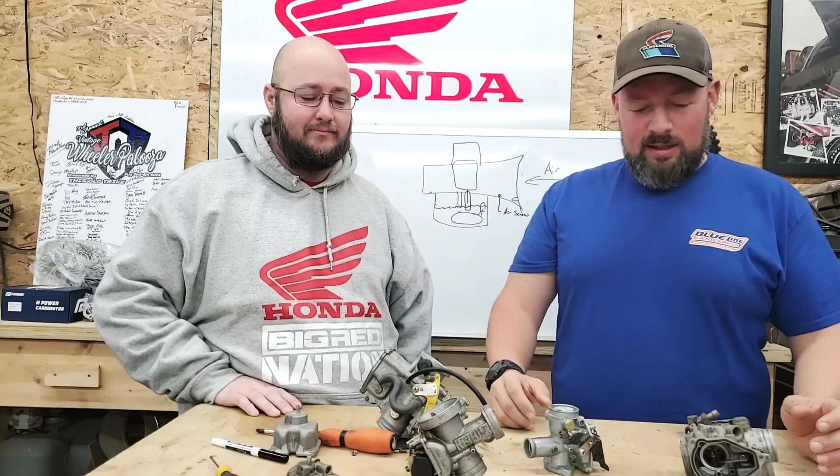Hey guys, thanks for watching. So I'm here with Curtie. We've got a smattering of carburetors, nothing super pretty, just whatever I had extra, but this covers your Big Red 250s, 250SX, 350X, your smaller machines, your 185s, 200Ss, even down to 110s and 90s are different, I guess, but 250R carburetors, and then some more modern stuff, 300EX or 400EX.

It's got an accelerator pump put in it, but as we said in the beginning, we want to talk about some carburetor basics. All of them operate under pretty much the same principles, and that is the Venturi effect.

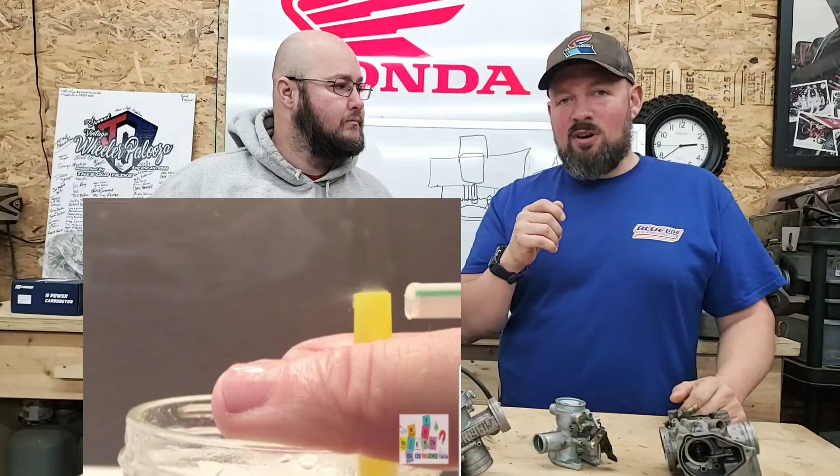So just like if you had a cold drink and you had a straw and you blow air across the straw, you can watch the liquid rise in that straw. That's the Venturi effect. And how big is that straw? Bigger straw, smaller straw? How fast are you blowing?

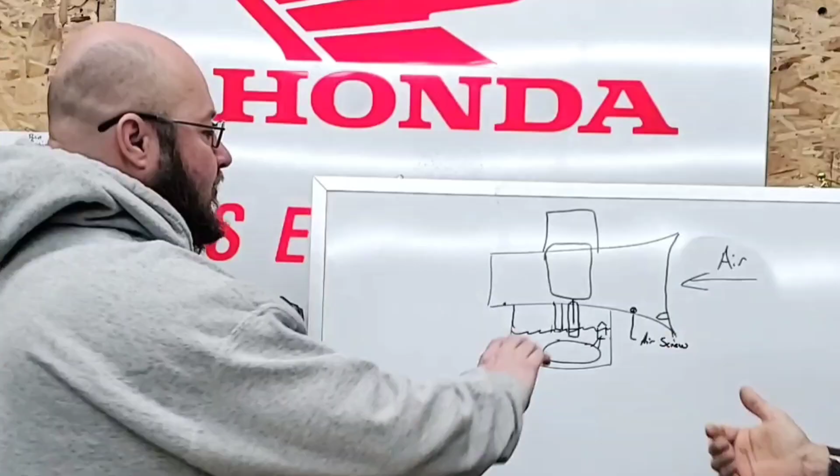As that relates to carburetors, we have air passing from your air box over here into your motor over here. It's a cone, basically. You called this the intake bell. So it is forcing that air down, and that increases speed? Yeah, well it'll be choked a little more here in the center than it will be even towards the engine side. So kind of out and then up, almost like an hourglass, where your slide is.

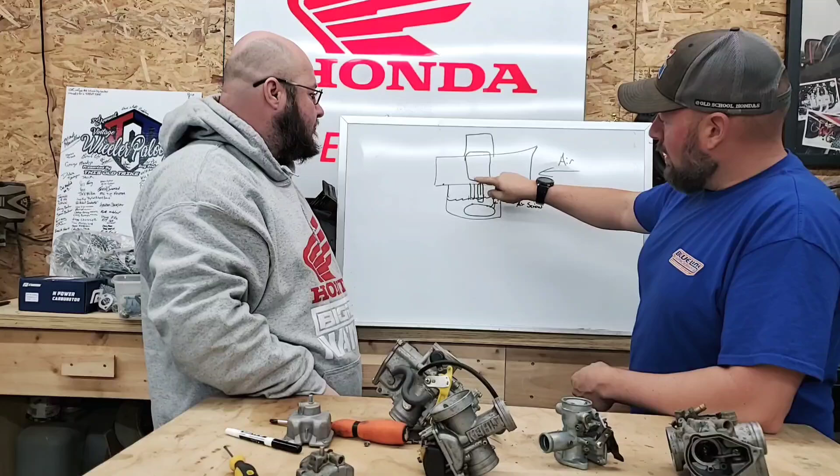So when that air rushes past, basically these are your straws. You've got your pilot circuit and main circuit, and sometimes there's a third circuit—we'll let Curtie talk about that later. But when your machine's idling...

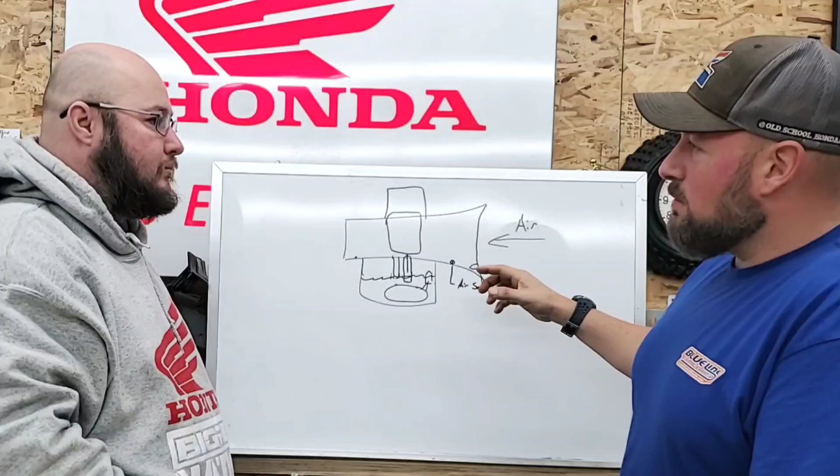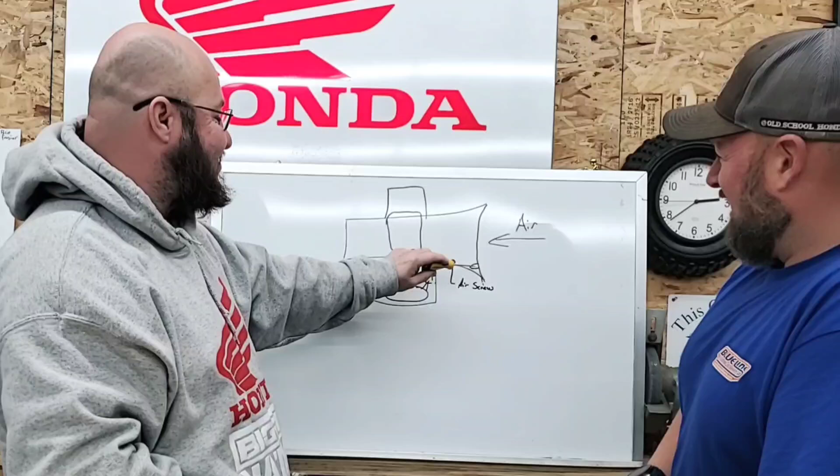It's taking air. You were describing this to me, I don't want to goof it up. It's taking air from a different spot when it's idling. Right, so when your slide's all the way down and you're at idle, pretend this is a nice little intake hole for your pilot circuit. A little bit of air will come in through here, it'll be directed, there'll be kind of vents.

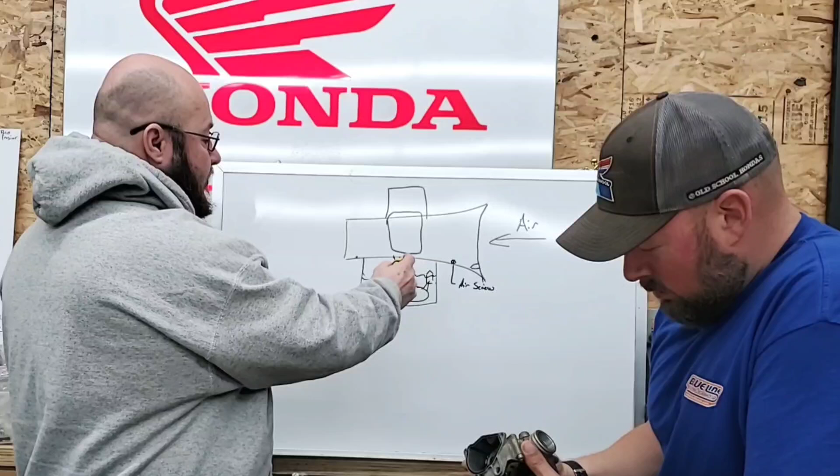The carb is a lot like a heart—there's a lot of circuits and everything that run through the carburetor. So air will come directly past the pilot jet or pilot circuit and come out a little hole on the engine side, and that's what kind of controls your idle to third throttle.

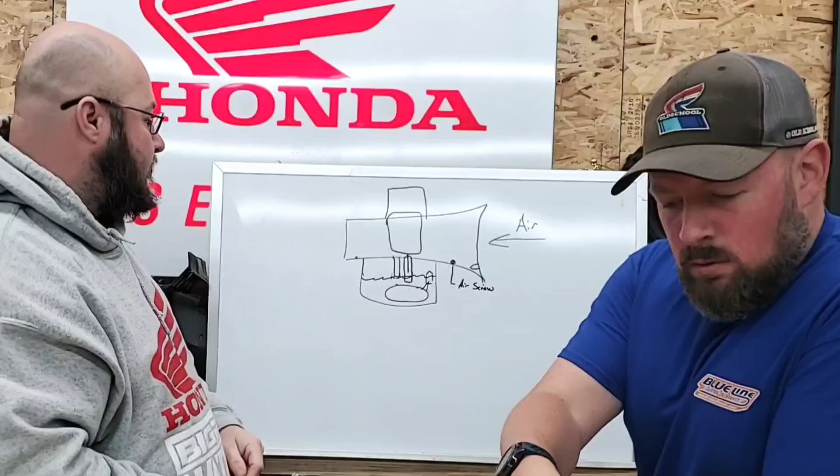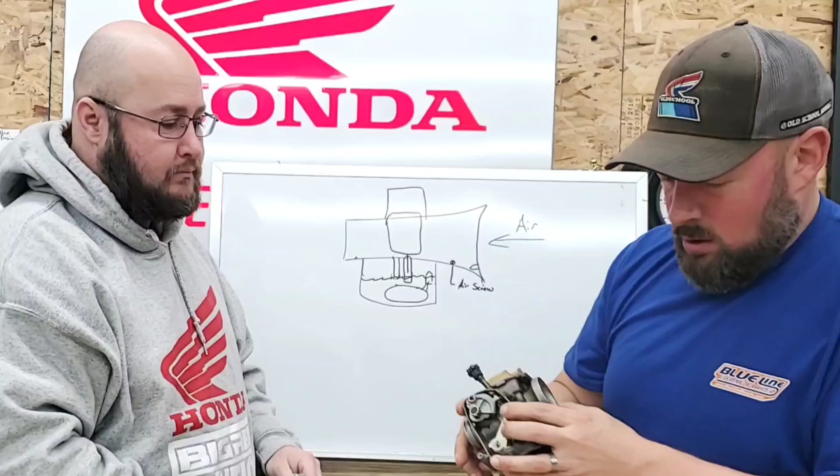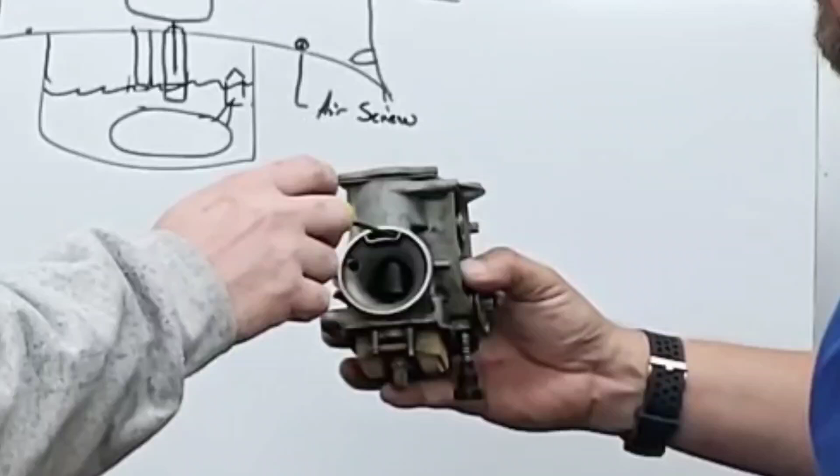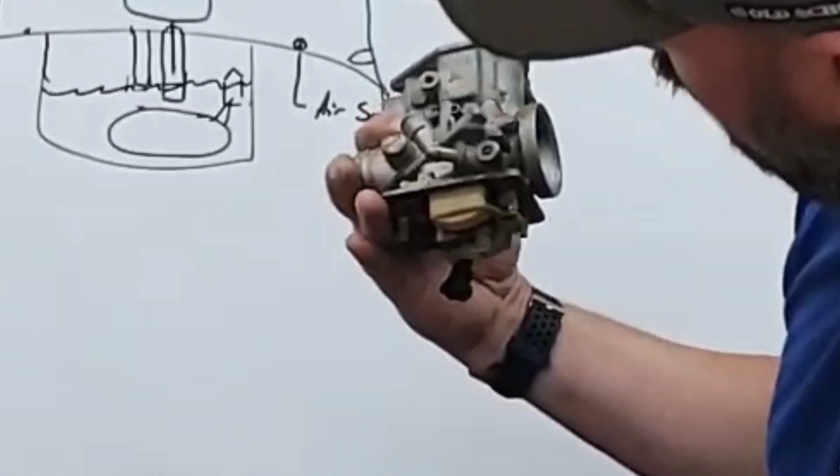So on this, it's these tubes, right? This is your 250R carburetor, you've got these right tubes down here. Now where is it on this guy? Oh, right down here, I was looking at it backwards. Well, I'm upside down. So on this carburetor, which you'll find on the 250 Big Reds, 350X, TRX 250s, 350Ds, it actually comes in right here, and the ports are up here, so it kind of sucks air in through here. You can see on the sides where those circuits come down into the pilot jet or main jet or primary jet. Wow.

Okay, so when it's idling, it's getting air from a different location, and it's just sipping the fuel. And so that's why this one barely touches. Right, well yeah, your pilot jet will sit higher than your main jet, it's just kind of set at the level of the fuel. And think of it like a gas stove or a gas range.

You have that pilot, that little pilot. You're not operating your stove, but you still have that pilot lit, and that's exactly what a pilot circuit does. It just keeps enough fuel to keep that engine running at idle up to third throttle. Now, it doesn't shut off.

Once you start lifting the slide and you pull the throttle, it starts sucking up some fuel through the main jet here to get into the Venturi. This is still supplying fuel. So it's going to supply fuel through the whole rev range, but it's just going to be a metered fuel, just a set amount.

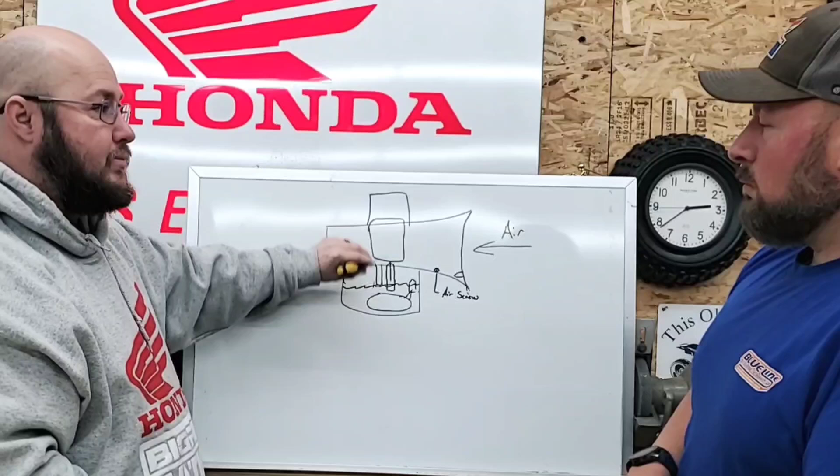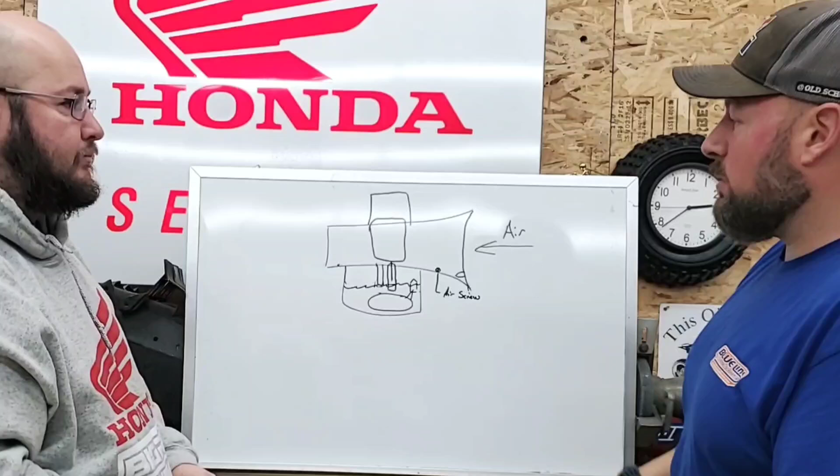Whereas the more you lift the slide, the more fuel comes through the main jet circuit. So as you start to give it throttle and your slide raises up, opening the needle, there's space that opens up around the needle, so it starts to drink and suck fuel from there.

Yeah, and it atomizes, so it mixes with air. Right here in the venturi. So the venturi is actually this section right here.

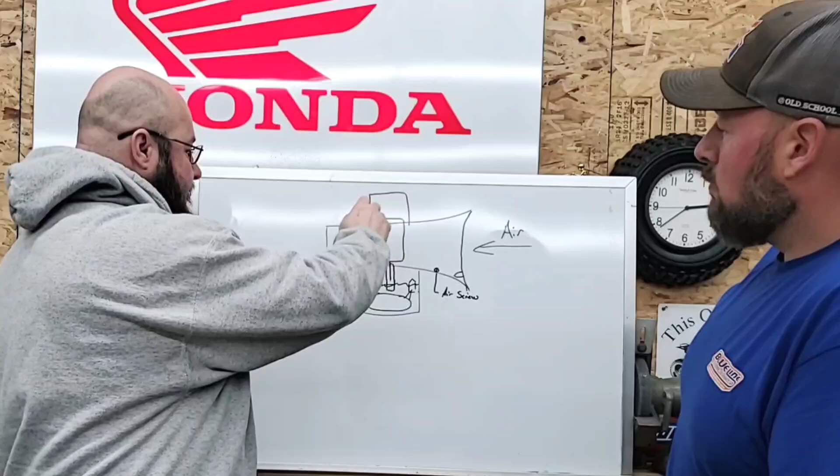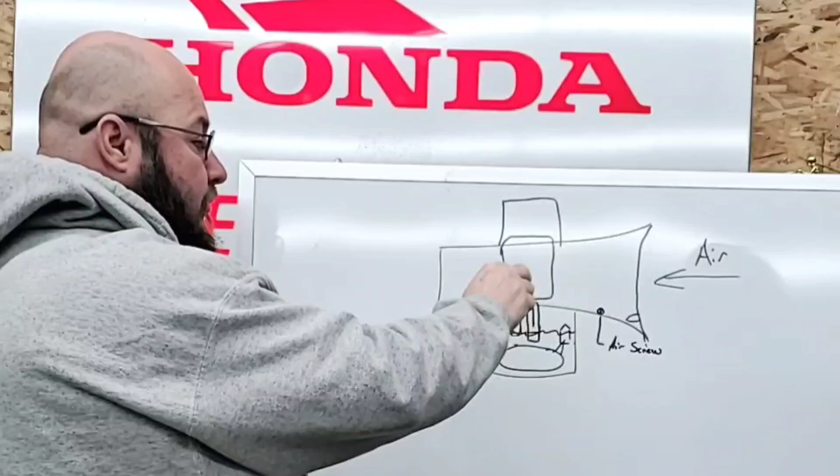So as you lift the slide kind of in your mid range, because the main needle is kind of cutting off the main jet, it's kind of allowing a little more and a little more as you lift it through the main jet until it's just all the way up and it's all main jet.

And it kind of comes up here, circulates around, and as that air gets sucked in, it mixes with the fuel to shoot it into the engine.

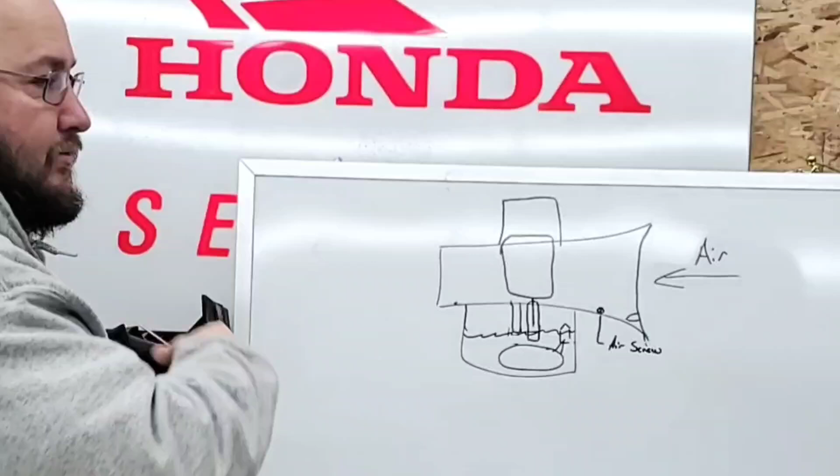Cool, so that's really the basics. The only other thing that's coming to mind is this is our float down here. So this is our needle valve. This would be connected to your gas line coming in.

So as your float goes down, the needle valve goes down and lets fuel in. As it rises, it seals up. It's got that rubber tip on the needle valve.

And this level here is as important as what jet you're running. So if our level is too high, that is going to force too much fuel prematurely through the pilot jet. And this is a situation, especially in a two-stroke.

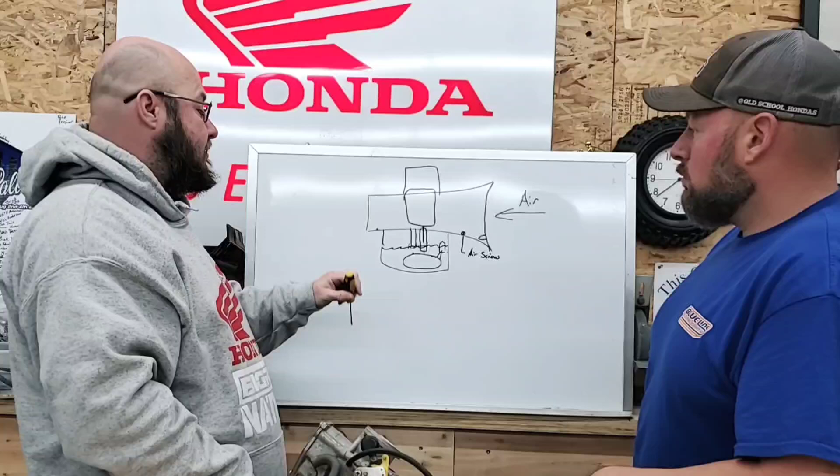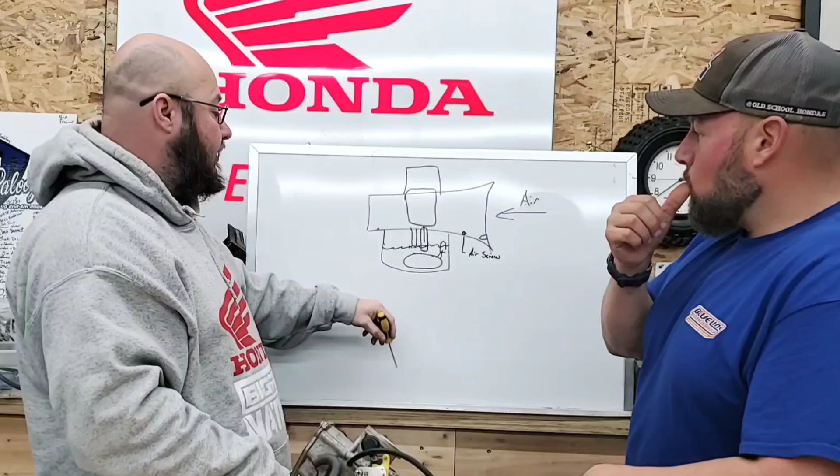If we've got the idle screw cranked all the way in and it's barely idling, that means your float level is too high. It might not be high enough to where it's coming out the overflow and it's flooding out, but it's too high, kind of causing that premature rich condition.

Or if it's too low, like if you shut the gas off on your tank and you're draining the carb out, right before it dies, it idles way up. That's because the level drops down so much that it leans it out. So the level of your fuel is very important.

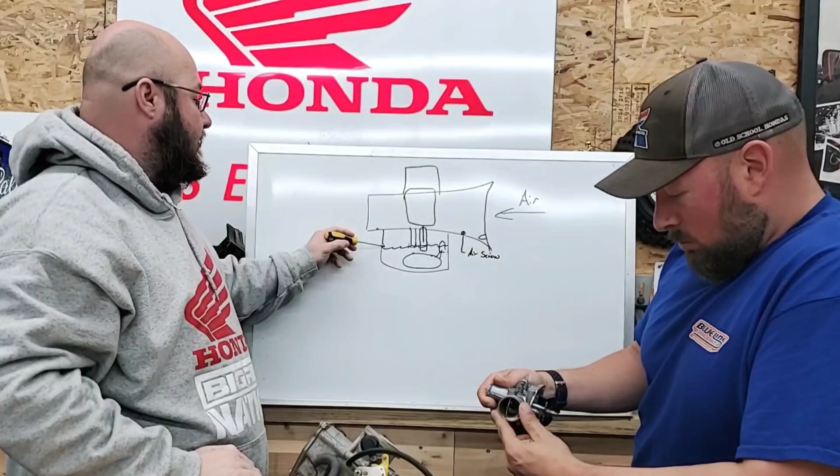Now a lot of your floats, especially like this float right here, isn't adjustable. It's all plastic, so it's not an adjustable float. So that kind of takes the guesswork out of where our float level needs to be, right?

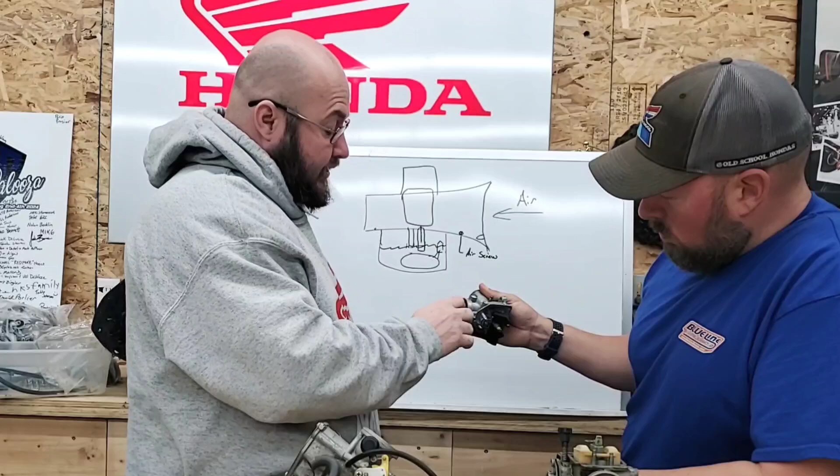But then we have guys like this that's got a tab on it. And some people, you'll find that if their float needle gets worn and it's not sealing and it's kind of flooding, they'll bend this tab to put a little more pressure.

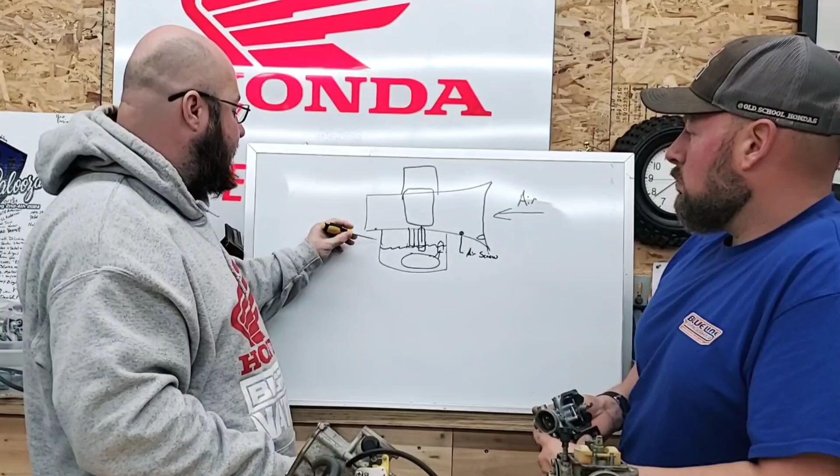But the problem with that is when you bend that tab, you're lowering the level of fuel in your bowl. So you're kind of creating an overall lean condition.

That makes a lot of sense.

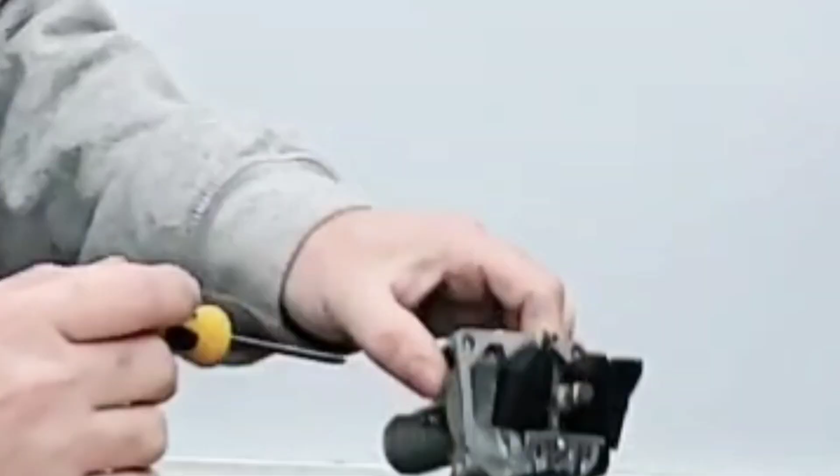And if you're wondering about where my float level needs to be, you measure it from here with the carburetor, with the float just resting on the float valve, not pushing down. So it's just resting there.

So we're going to take a measurement from here to here. And depending on which carb, it's going to be a different measurement.

Of course you can go on our website if you have, like this guy right here, PJ03A. So that tells me it's a 1986 ATC 250R carb.

You can go to the Identify My Carb section, select the PJ series carb, select the 03A. That'll tell you all the specs, including the float height that it should be at.

Okay, and you measure to the lowest point because this float tapers down. So we measure to the lowest point? To this point right here. Okay, so to the top.

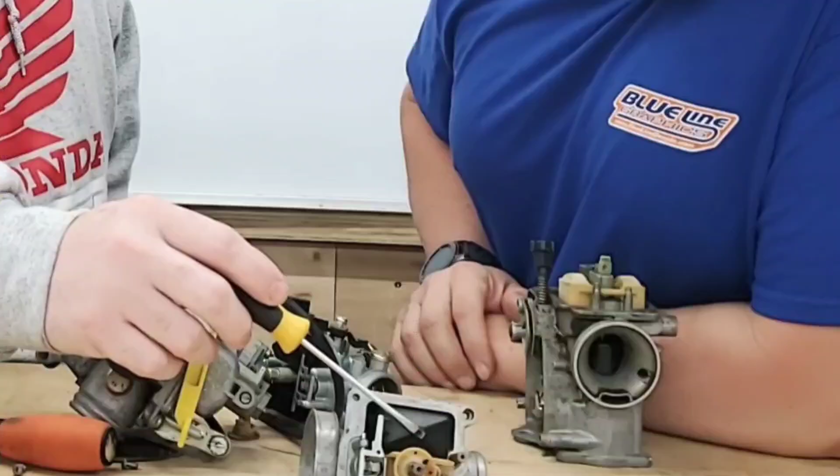So we're going to kind of put it at an angle like this to where the float is just resting, just seated. And then you'll measure from the body line to the top here.

Yeah, something I never think about. I'm just a hack when it comes to this.

Okay, some carburetors, this might be a good time to switch. Like we were talking about, we were working on a 250R carburetor, which has an air mixture screw, versus a 250 ES Big Red and 350X.

They have a fuel mixture screw. And your PD series, so your 185s, 200s, have a fuel screw.

So what makes an air screw? What makes a fuel screw? It all depends on what side of the carburetor it's on. So if we're on the airbox side, this becomes an air screw. So what we're adjusting is how much air gets put into that pilot circuit.

So this is only for idle. Well, idle to third throttle, but it does control the whole rev range because remember your pilot is still feeding.

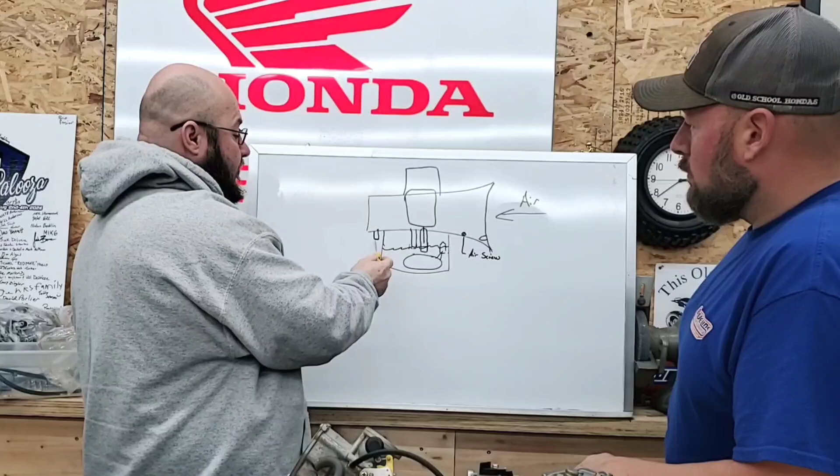Even if you're wide open throttle, your pilot's still feeding. So the air screw, you're cutting off or adding air to compensate for the size of pilot jet you have. Now on these carburetors, our mixture screw is here on the engine side, so it's a fuel screw. We're not adjusting the amount of air coming through the circuit, we're adjusting the amount of fuel allowed through it. So if we bring the air screw out, we're adding air. But on the fuel screw, if we bring it out, we're adding fuel to compensate for the air coming through the circuit.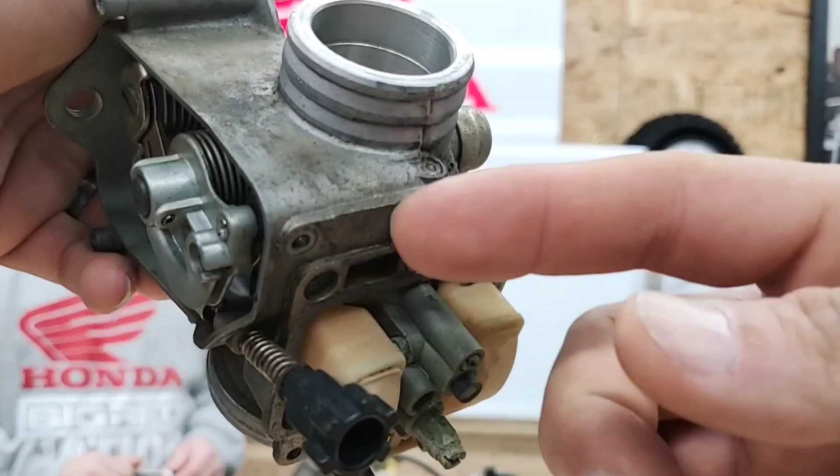He was pointing out to me, this is the engine side on a big red carburetor. Need a little pointer, you see that dot? I'll put a circle around it on the video. That is the port where your adjustment, which is here, is where the fuel's coming through.

Versus, can we see it on the 250R carburetor? Yes, a little better because it's kind of at an angle. It's on the other side, on your engine side, where it's coming out. Oh, right here? Yeah, okay. So you're adjusting it on the back, but it's coming right out there in the center, behind the main needle.

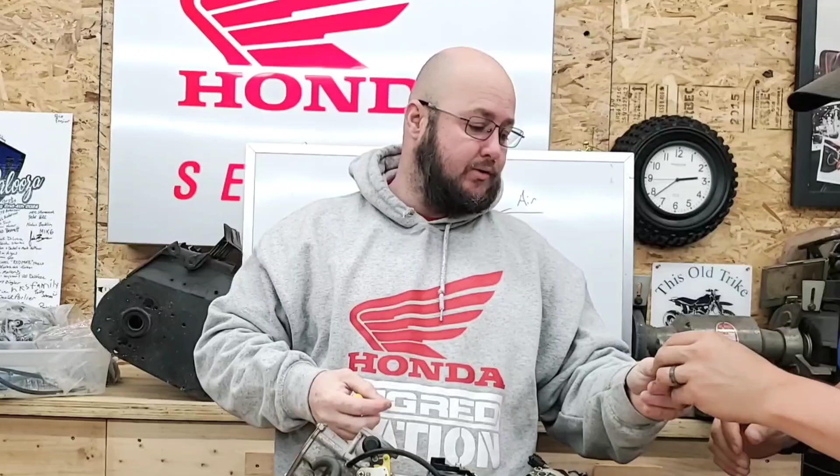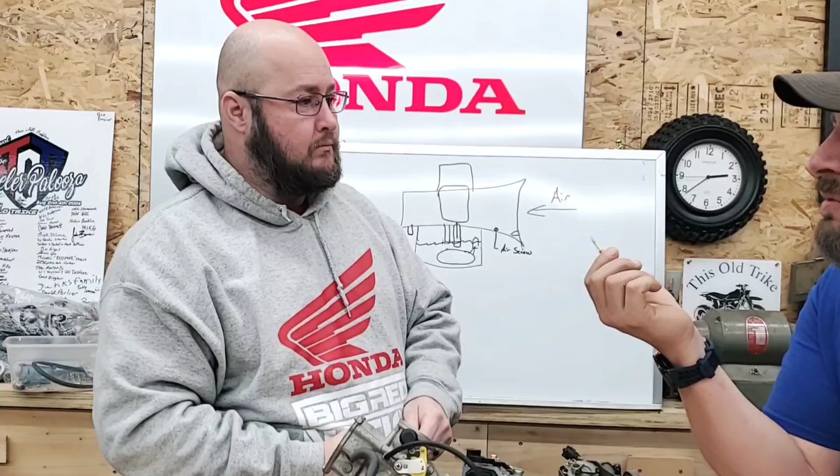And you can see your mixture screw here. This is actually a needle. Yeah, that's tapered, so that's what's doing the work. It's a metering needle, just like the main needle is. So the main needle is exactly like your mixture needle. So when I get these in the rebuild kits, I don't put this part in. You know, these don't wear out, do they?

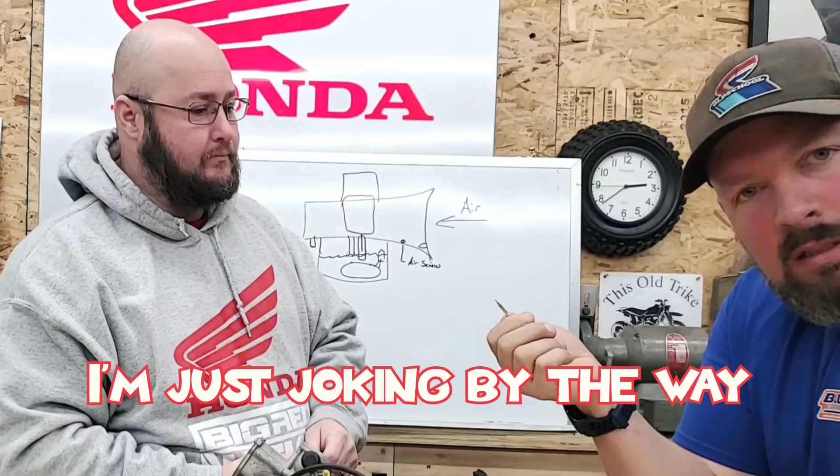Oh yeah. So this is important, and you probably have to use all the O-rings that come in the kit, and the springs. There's a spring, then a washer, then the O-ring. So the O-ring helps seal where the seat's up in here, so you're not getting any extra air coming up around to mess up your mixture there.

You have a YouTube, right? Did you do any rebuild videos? Oh yeah. So I'm going to put links to Curtie's rebuild videos in there. I need to do a lot better about that. It's a goal this year to actually crack down and do more carbs, because we've done a really detailed video on this style carburetor, the QA, how to adjust the linkage timing and all that fun stuff. But as a hack, as I've described myself...

You get these kits and you're like, man, there's a lot of parts in here I didn't realize. And sometimes he was pointing out aspects of the carburetor that I didn't even understand or know about. So from a point of ignorance, you can think you're rebuilding a carburetor and missing some very key components. One of the biggest things a lot of people don't replace, and they should replace every time, is under the main jet and main jet holder.

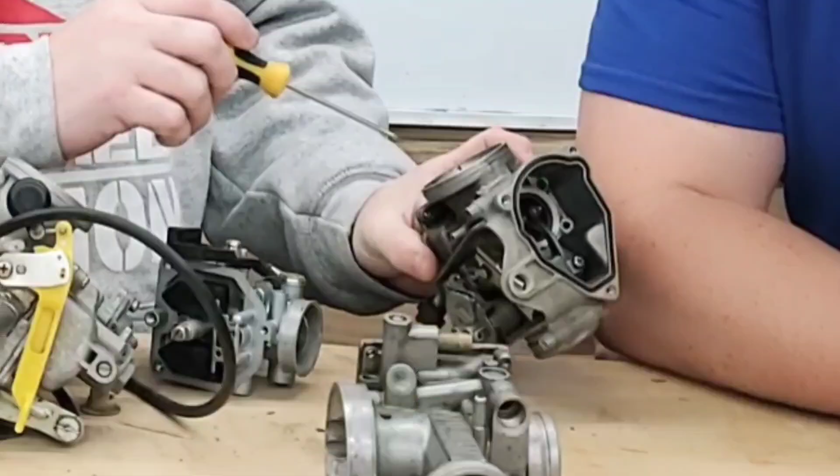But under that, and it's kind of hard to see, what the needle goes into, this little brass piece sticking up through the venturi, is a needle jet. And those wear out because your needle is constantly going up and down, and it's just brass. Your needle is typically steel, your needle jet is brass, so it's just working back and forth.

What happens is that needle jet will egg out, and a lot of people don't replace that or don't know to replace it. Those all come in the kits. You definitely want to replace that along with the main needle, because those are probably the most worn items in the carburetor, and probably the most often not replaced.

I think you were telling me about those before, you say you've just got to gingerly press that down with a screwdriver. Well, I like to use a straight pick. Because if you try to use a screwdriver, since it's really thin, you kind of swedge it out, and it's going to make it a lot harder to get out. But with a straight pick from the top, after you pull your slide mechanism, you put the pick down there and just tap it with a hammer, pop it right out. Sometimes it's a bit stubborn.

Use some heat, like a little propane torch or butane torch. Not so much that we're melting the cast aluminum, we don't want to do that, but a little bit of heat because it'll soften all the gunk and varnish around the main jet, and it'll help ease it right on out.

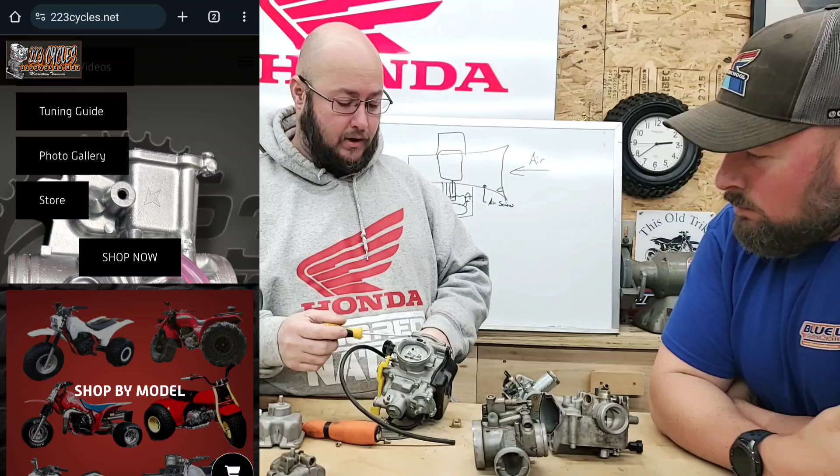And of course, we offer the 300EX carbs for the Big Reds, SXs, the 400 carbs, and we set them all up per order. So I look at what the machine has had done, if they've modified the airbox or exhaust, look at their elevation, and I'll jet it and set it all up to where it's as plug and play as much as possible.

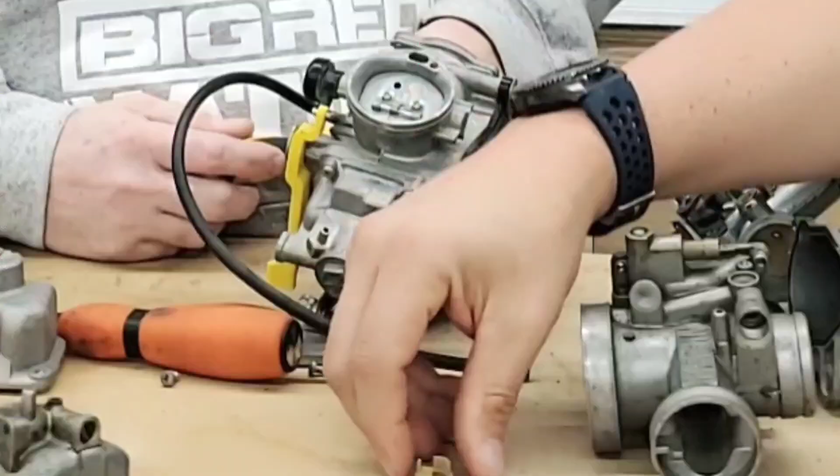These don't do anything, right? These little ones, you can throw these out. Well, the intention is good. So these are what's called a main jet baffle. They go around the main jet, and the idea was that if you're in real rough conditions or riding wheelies and that type of stuff, it helps keep a little more fuel around the main jet.

Here's the problem with them. They've got some years on them, a couple years, 2 or 3 or 5 or 20. These get brittle and they don't stay in place. So you put them on here and imagine what they're doing, well it's a Chinese carb, but you get the idea - they just fall out, they don't really stay in place. So what happens is these come dislodged, hanging around a float bowl, and most of the time they'll hang up the float, causing the machine to flood.

So when we restore the carbs, actually this was this guy - yeah, it's my first time, I'm learning. So when we restore them, we really don't put these in there because I'll be honest with you, I ride some of the roughest stuff 99.9% of track riders ride. I've never once ever had an issue, but I also have never had an issue with this hanging up my float either.